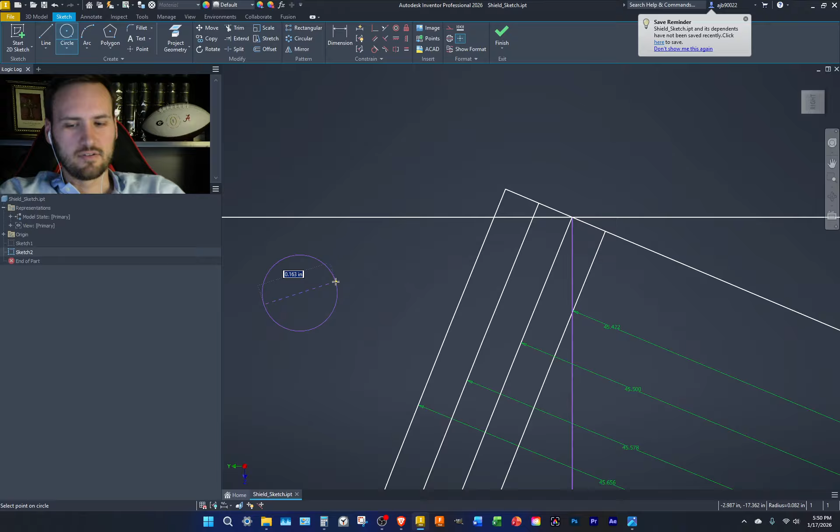0.234375. Let's restart this. Okay, so my idea is I'm going to take this here, put this here, and I'm just going to snap it into place. Let's see if this will work. So I want this to touch here, and I want that to touch here.

Perfect. All right, so now take this circle, have this touch the center point again. There we go. Go up. And now we can get rid of this. And of course it broke. So let's get rid of that. Constraint, there you go. Get rid of these lines.

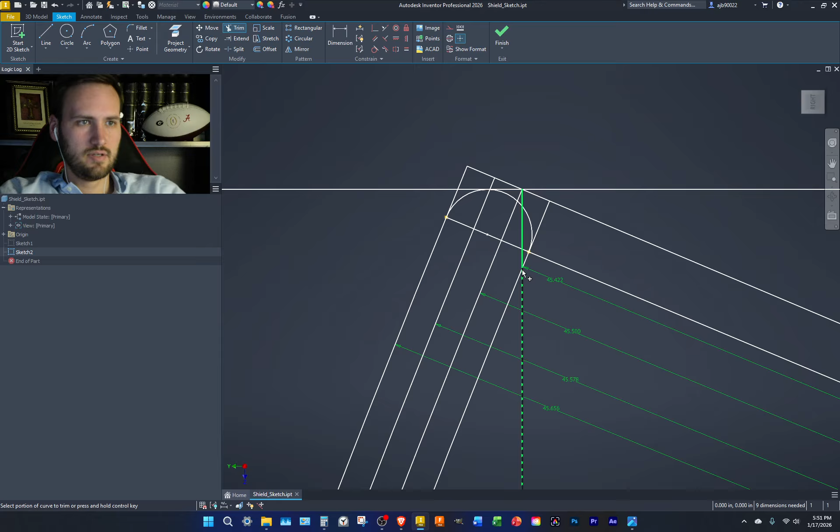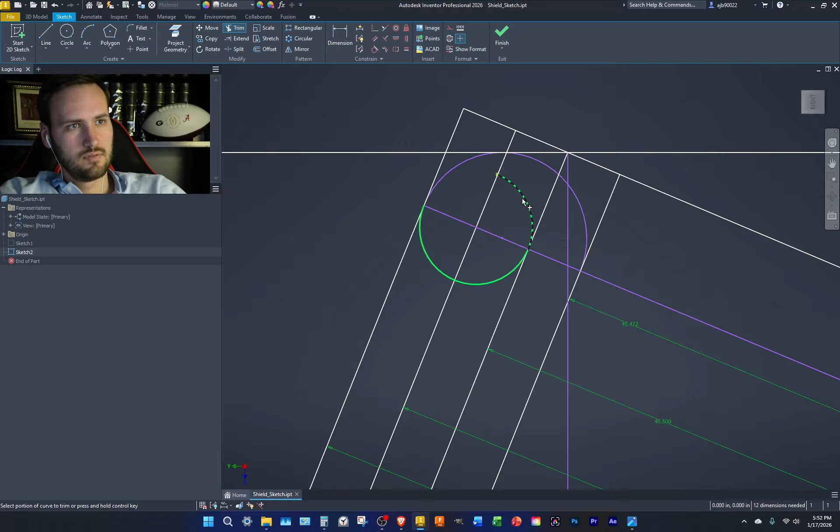All right, so now let's get rid of that. Let's connect these two again. Get rid of this. Connect those again. So now let's take this. Connect that circle. And there we go. Now we do that a couple more times. So let's go ahead and...

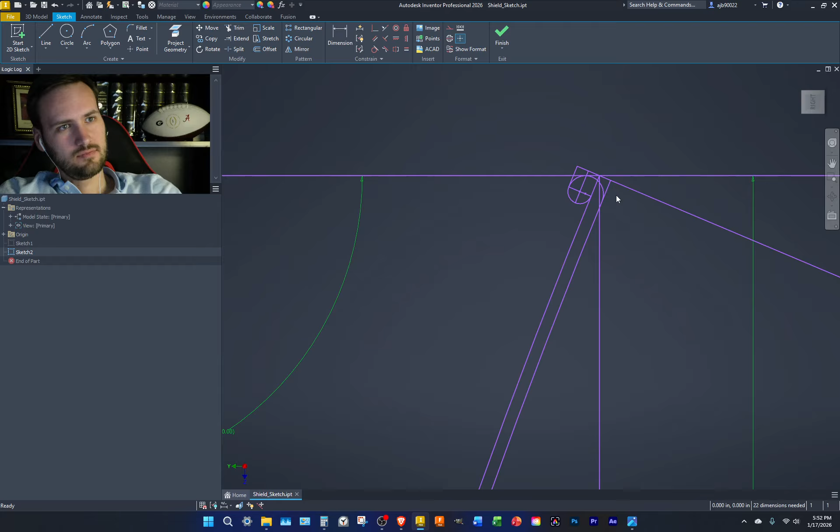Problem is each of them are going to be different. Get rid of that. Get rid of this. Don't need this anymore. All right.

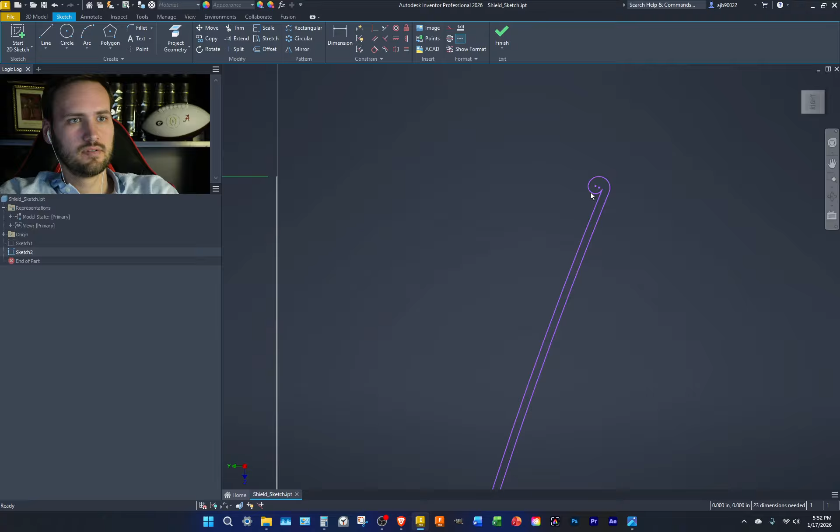So there's our first true roll that I want to put into this. And let's go ahead and get rid of this for now. Get rid of that. And let's give it a look to see what it'll look like in 3D. Whoops. Cut. Get rid of that.

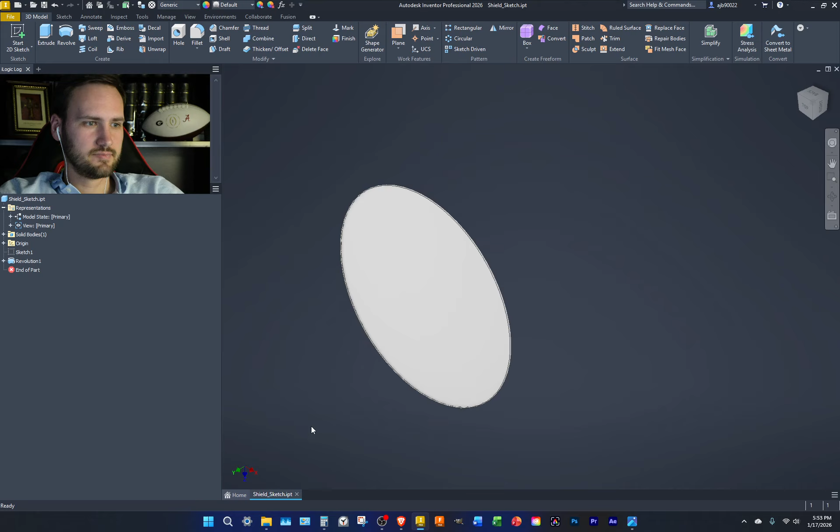All right. So this lip is essentially what I've been going for, and it looks pretty good. I've overcomplicated it to a significant degree, but I wanted to be accurate to the material. So there we go. Save.

So let's go ahead and rename this. Should be able to rename it. So base, and caps lock is on. Let's see. Let's do outer ring, or let's do ring outer. There we go.

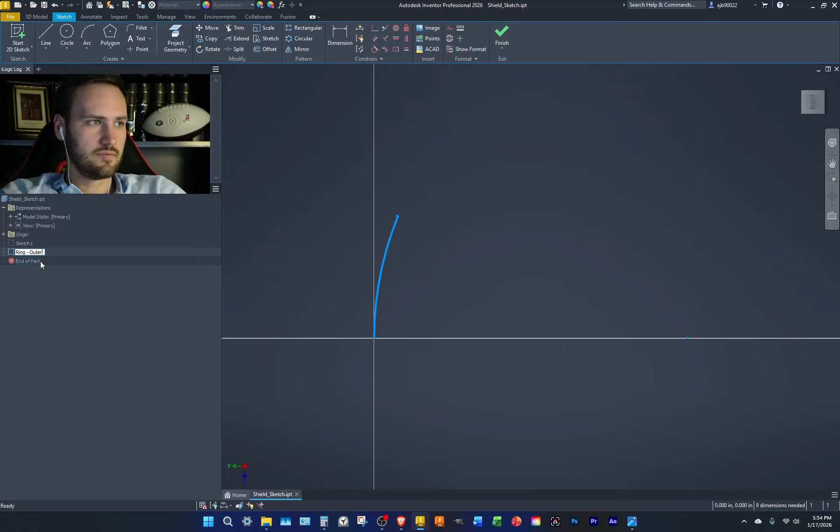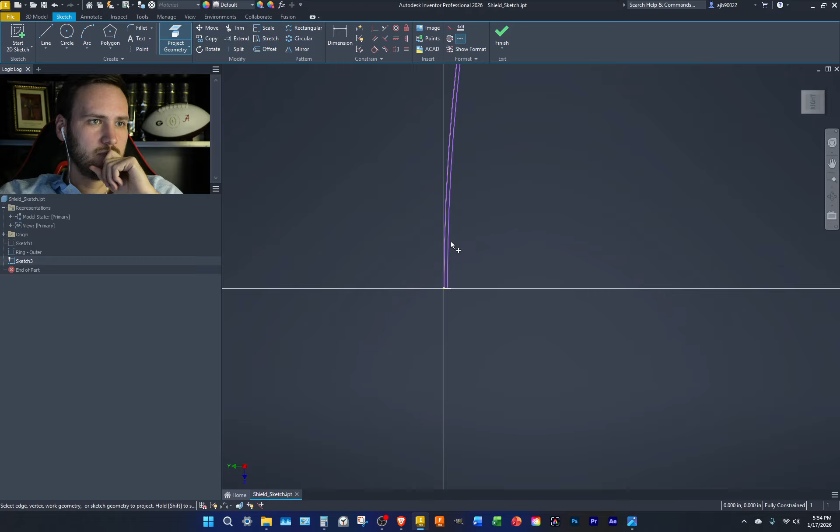All right, so now we have to figure out the inner ring. So let's go ahead and do this again so we don't screw up what we've already done. So let's project this geometry, project that geometry, so we have a good foundation. There we go.

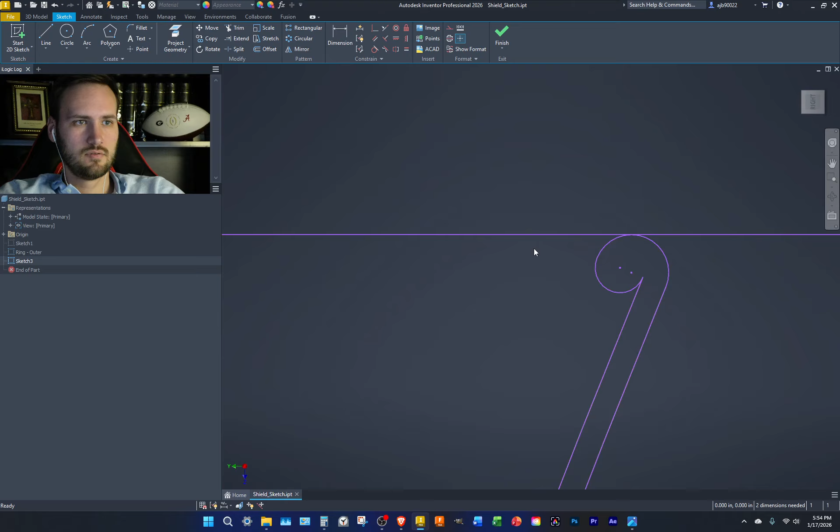35. Don't need this. Cut across. Let's go ahead and project all of it. Don't need that. Don't need that. Let's go ahead and suppress this ring. So we still got one more constraint. Okay. Cut this there. So let's go ahead and go down 3.5. And so there we go.

Now, the question is, there's two ways to go about this. If this is a really strong individual, let's calculate this. How heavy? I guess I could calculate it already, because this can calculate the volume, I'm pretty sure.

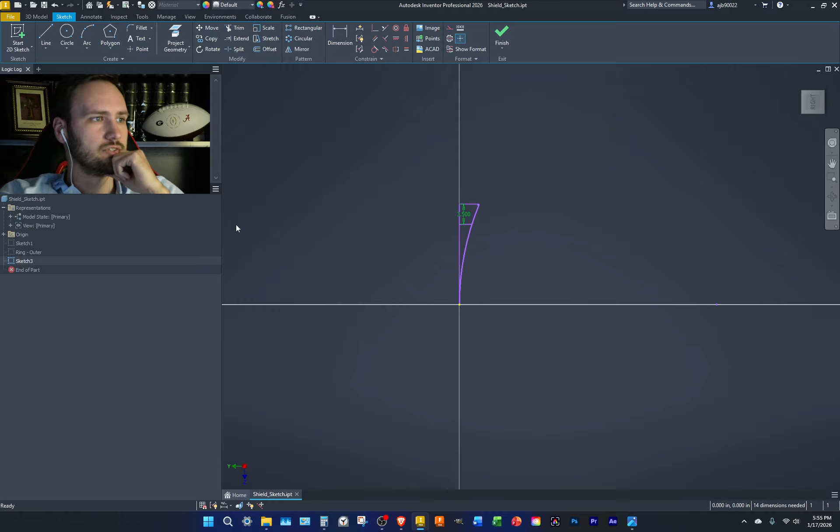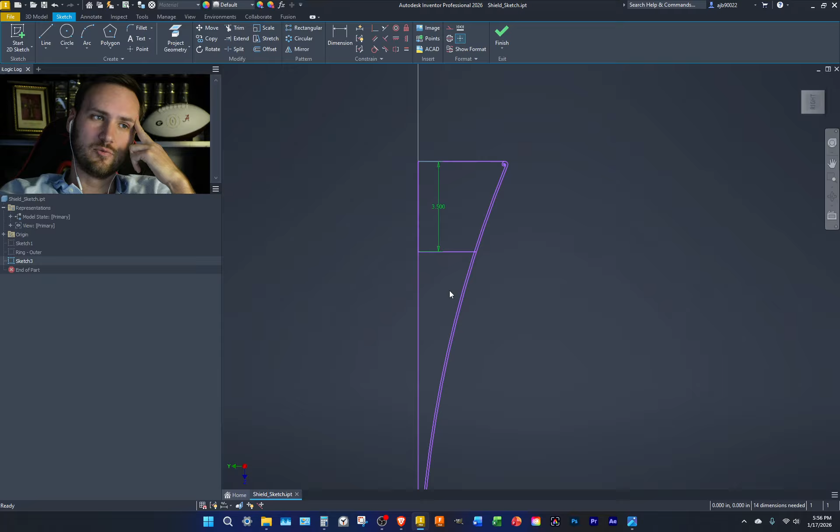All right, so basically what I'm gauging right now is, do I need to cut this into individual rings that are basically bolted onto each other? Can it be just one disc on top of a disc on top of a disc, and then they're not bolted, they're riveted together? And is that manageable for someone? I guess now we could assume that it is, especially if someone as exceptional as, say, Captain America, and then later on, if it's not, it's unwieldy, we can treat it as riveted rings.

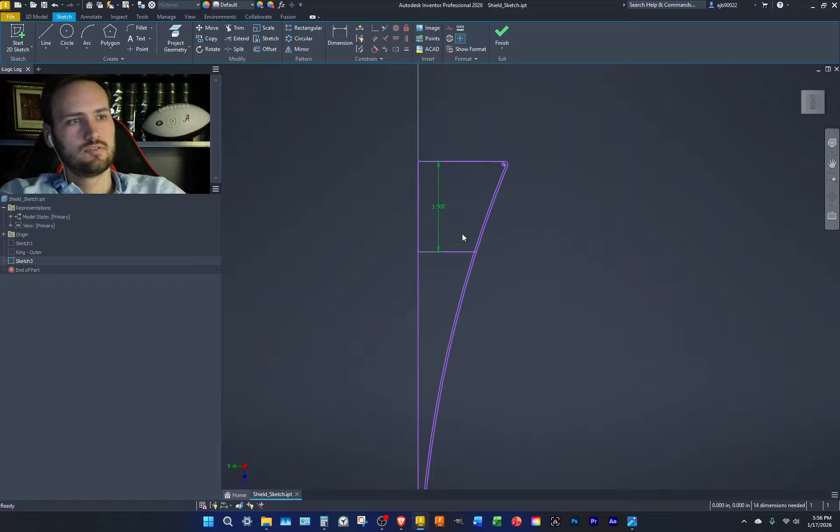And so let's treat it as if it's going to be one shield on top of another shield on top of another shield for now. Let's get rid of this.

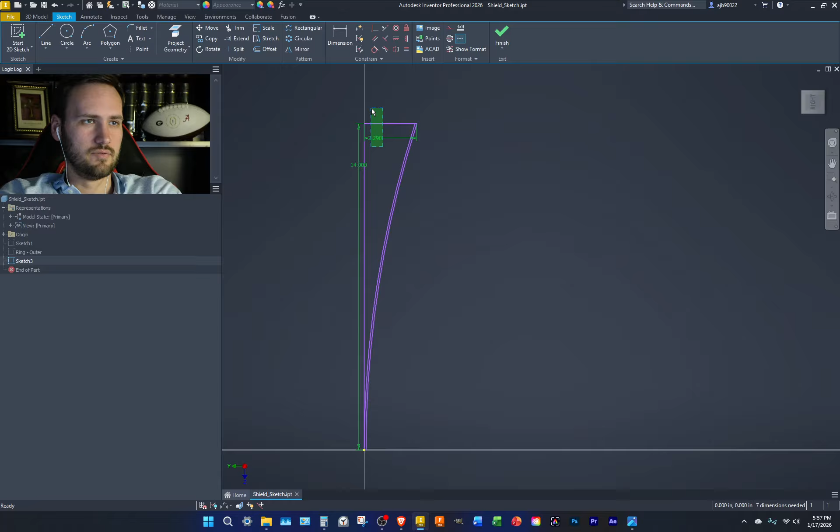So now let's add the constraints again. There we go. Let's go ahead and offset this. And of course, so let's get rid of this. Don't need any of this anymore. Why is it highlighting everything? Something here? Or is it just the constraints?

Or actually, it's probably just this. Okay, it's everything then. Okay, let's get rid of everything. Offset it. 0.078125. 0.078125. Offset. 0.078125. Alright, because it's going to be on the outer side, don't need this anymore.

Alright, let's go ahead and start adding constraints. Actually, I should have done this for the other one too, instead of that, actually tell me where the point is. Wasted time doing the other way. Sorry about that, guys. Let's do this.

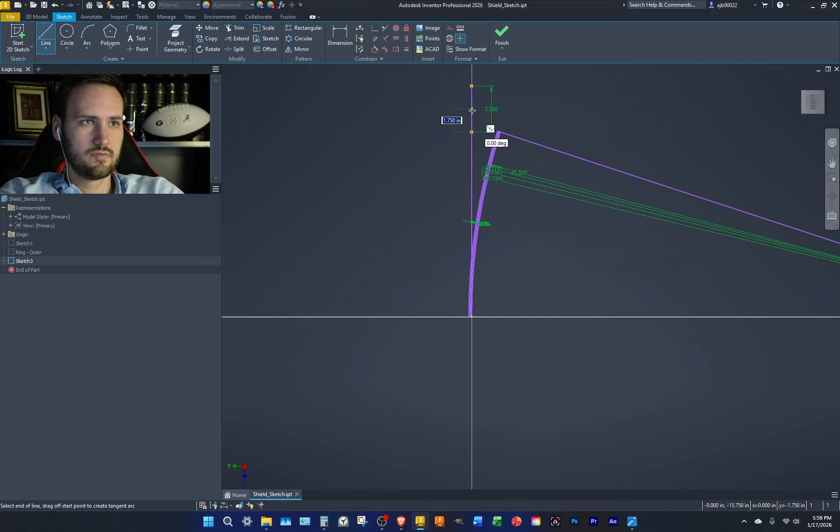Let's see. Let's go back to here and figure out. Actually, that's 35. Which means this needs to come down 3.5. Where is that point? Okay, so it's right here.

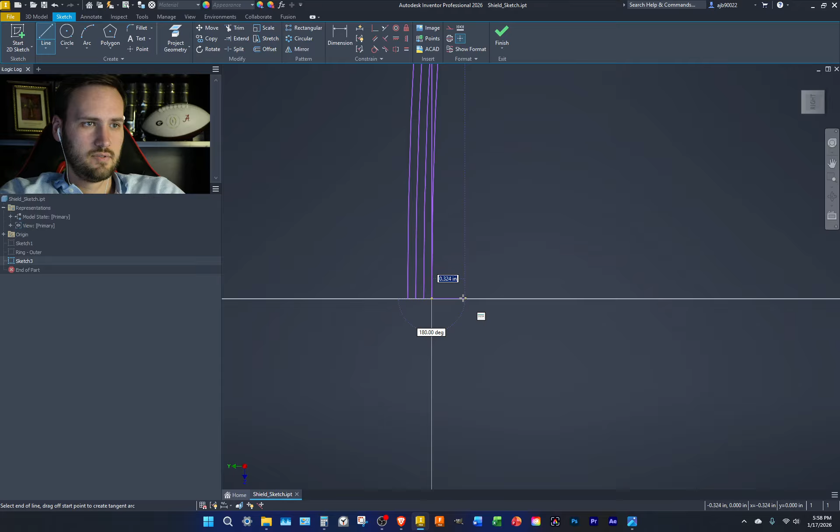So let's go ahead and get rid of this. Let's go ahead and add the following constraints. This is going to be a tedious project. Sorry about that.

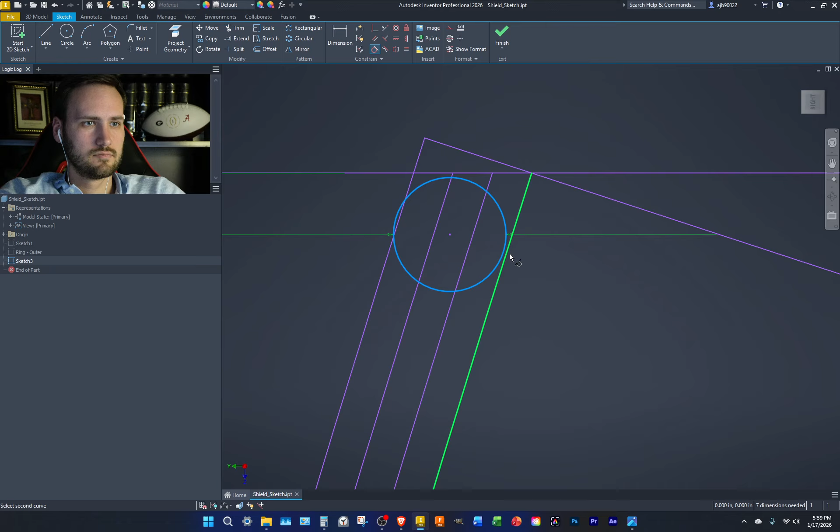All right, so what was the magic number? 0.234375. Oops. Okay, right here, zoom in. Right about there. Nothing moved. Perfect. Okay.

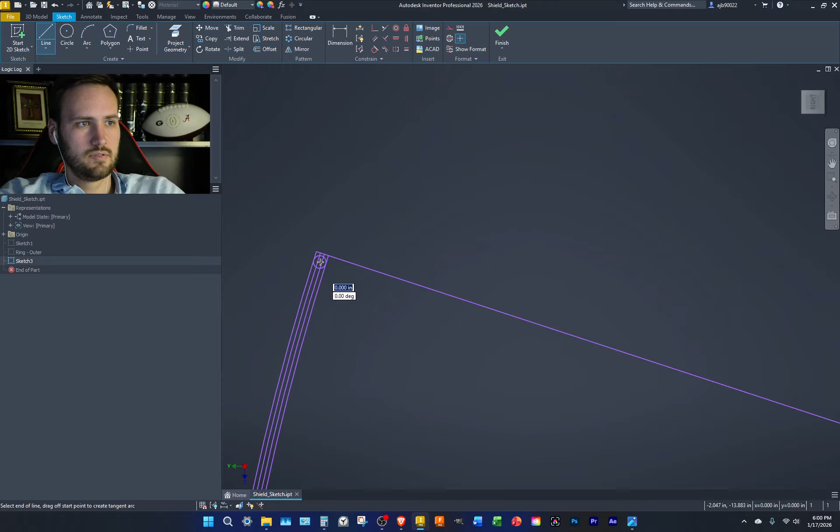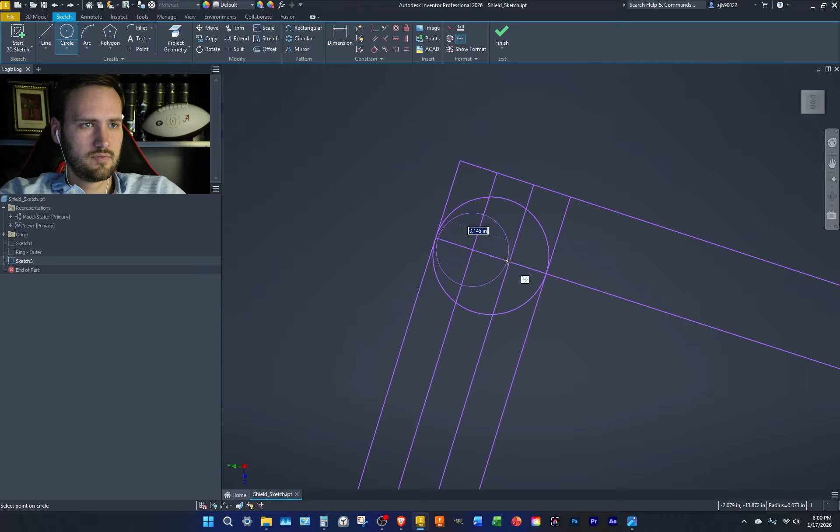All right, get rid of all the supports. Now we can take this, place it there. Okay, go back to the center point. Huh. So now...

We should probably double check this before we start getting rid of constraints. Which means it probably should have left this over here to begin with. My bad.

Should have gotten rid of that. Alright, cool, it works. Get rid of this, get rid of this.

Now I think about it, these aren't necessary, are they? No, they're not. Okay, so next time we do that, I don't have to worry about that.

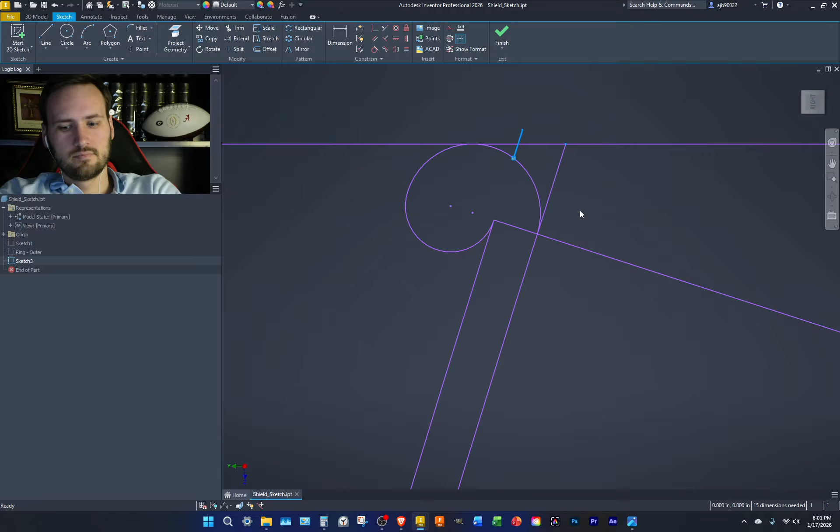Cut this. Okay, perfect, let's go back down here. Cut, cut. Finish. So now let's see.

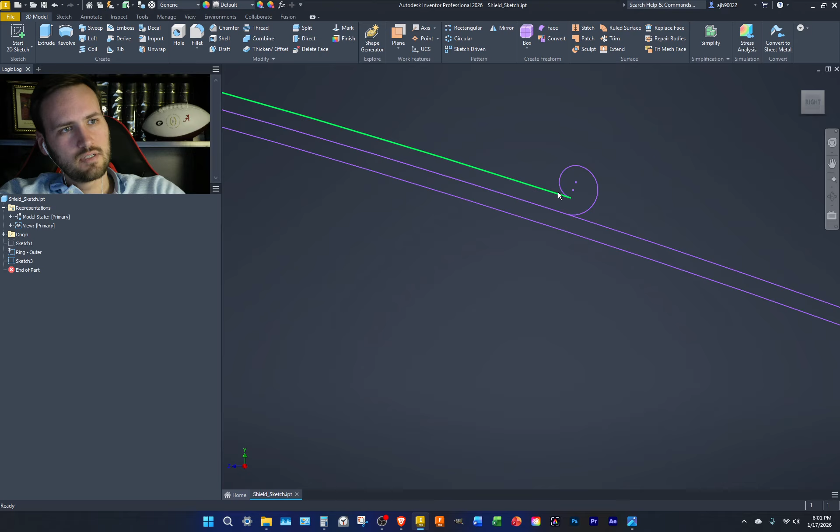How's this looking? That's looking pretty good. What do y'all think? So you can see ring after ring.

And I guess you can see here, is this layering necessary? You know what I mean?

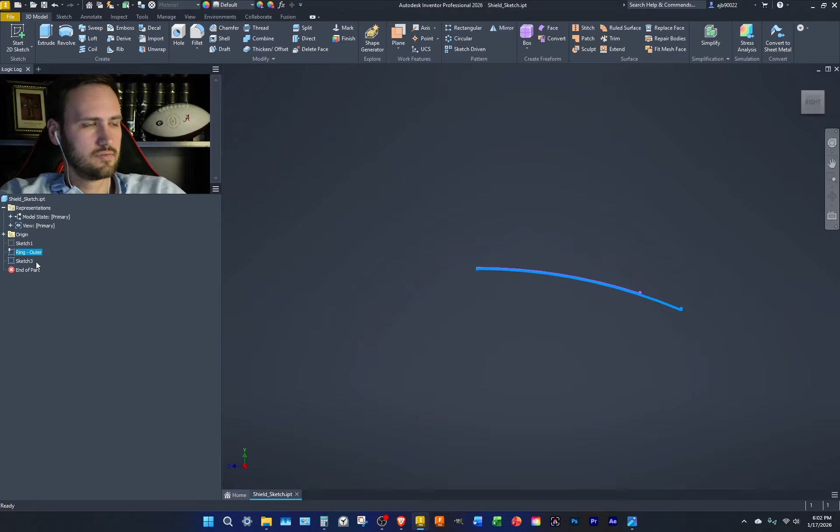Alright, let's go with the next one. Let's do ring, outer. How should I do this?

How many layers are there to the shield? So 1, 2, 3, 4. Okay, let's do layer 1 through 4 then. Seems like a better labeling system anyway.

Let's do layer 4. Copy. 3.

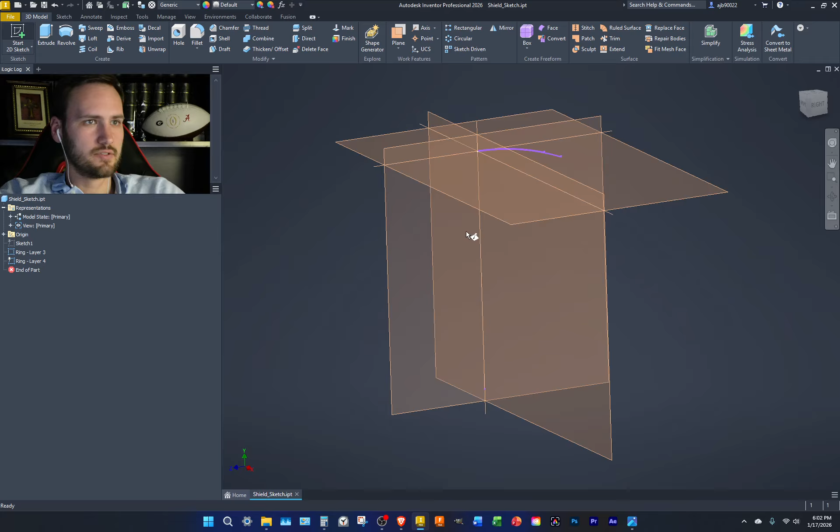That looks pretty good. Alright, let's do another sketch. Same as before. Let's go ahead and label this layer 2, and we'll move it up accordingly. Project, project. Delete, delete. Okay, let's rotate it.

Offset this. What we learned, we only need to offset it once.

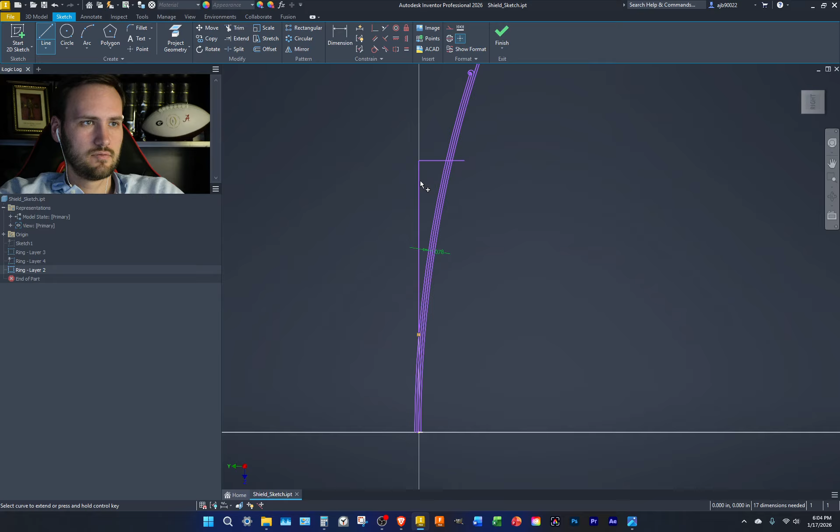There we go. Probably didn't need to do all that, but that's good enough.

I need to put that there, just so that's something to go to.

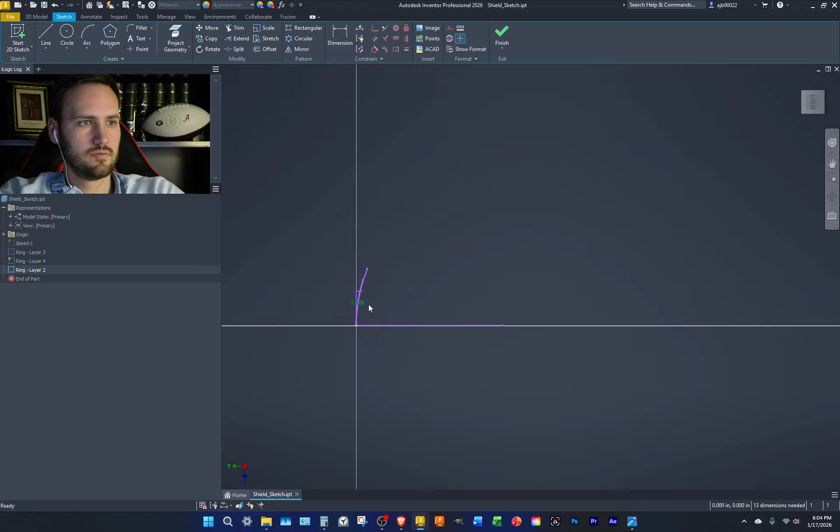Okay, let's take this point, bring it down. Alright, so no, we're not going for this one. We're going for the next one right here. So this is the point it should be going to.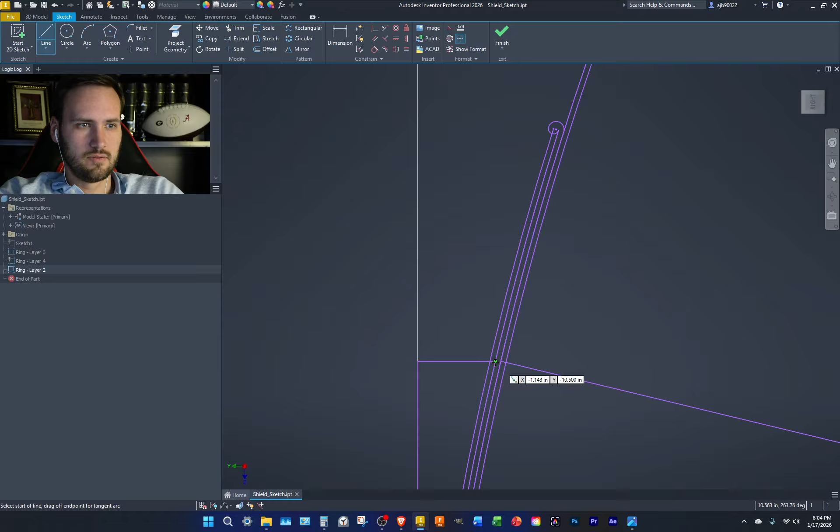It looked weird. There we go. Let's go ahead. So it's 10.5.

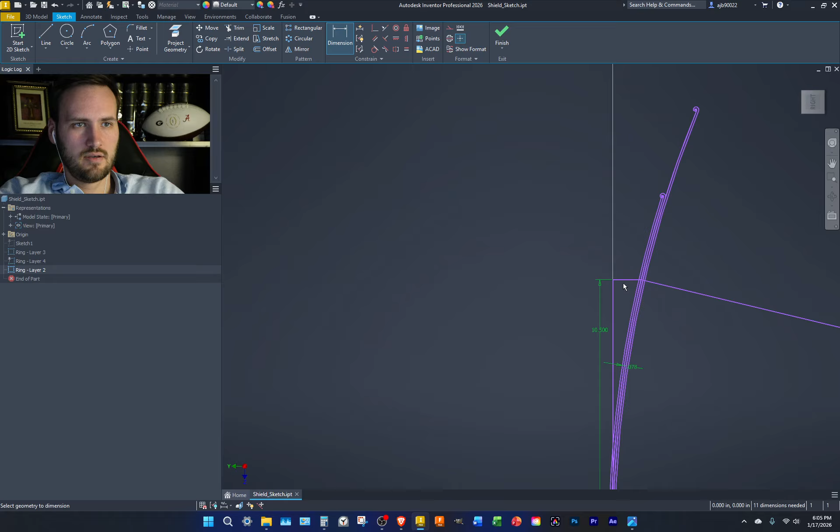Don't care about that dimension. Let's bring this down. 90.

Alright, so let's hide the layers so we're not confused. Okay.

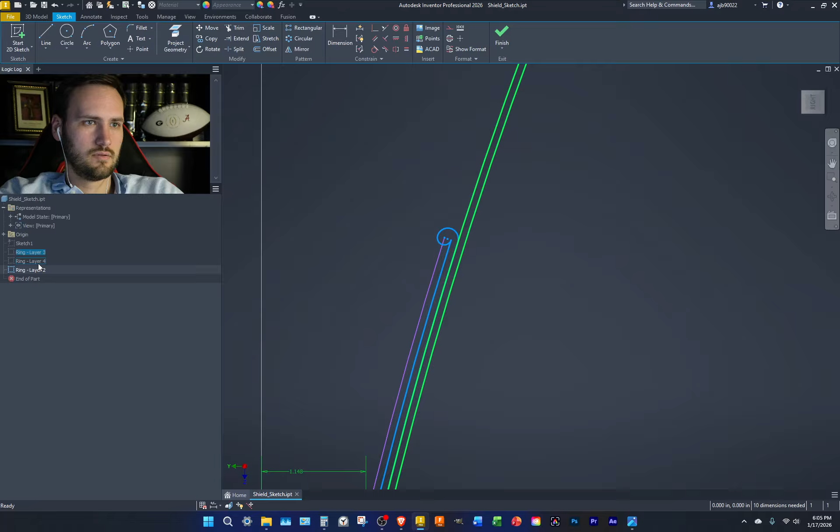Well, which one's this one? So we got that, that. Okay, so we accidentally highlighted the one, but let's see.

So we don't need this one anymore. Trim that. So really what we need is

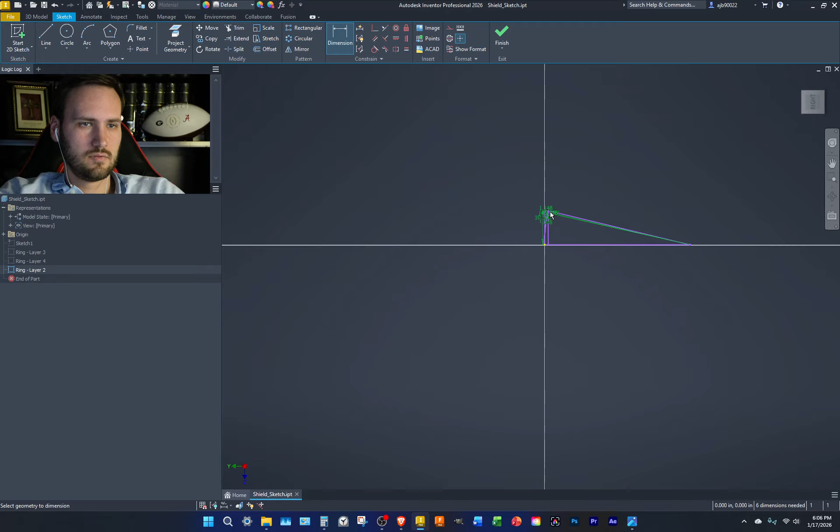Accept. Accept. Alright, let's try this.

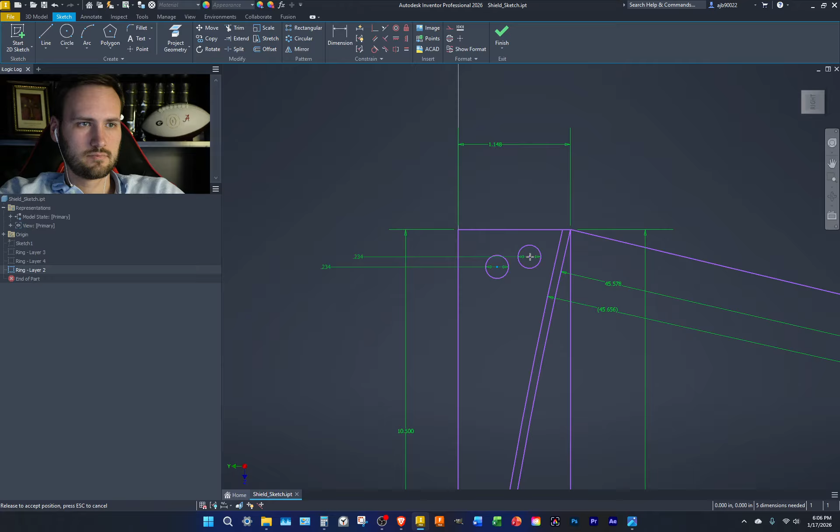0.234375. Please don't break anything. Perfect, perfect, awesome. So trim, get rid of that line, get rid of this,

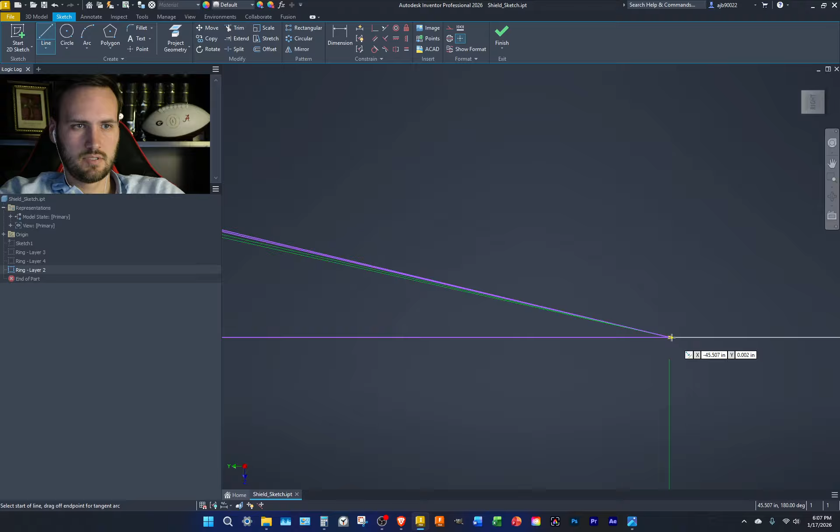Take that. Attach. Okay, before we keep going, I forgot to save. Alright.

So now, have that go there. That's why we need one more. To define that. We don't need the outer one though.

Perfect. Cut. Get rid of this, get rid of that. Don't need this, don't need that.

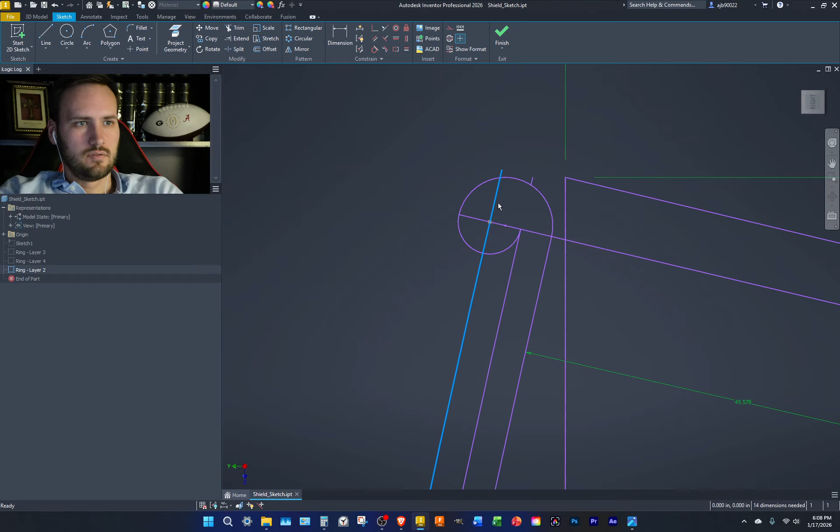Alright, so let's see what we got. Okay, let's go ahead and save. That's layer 2.

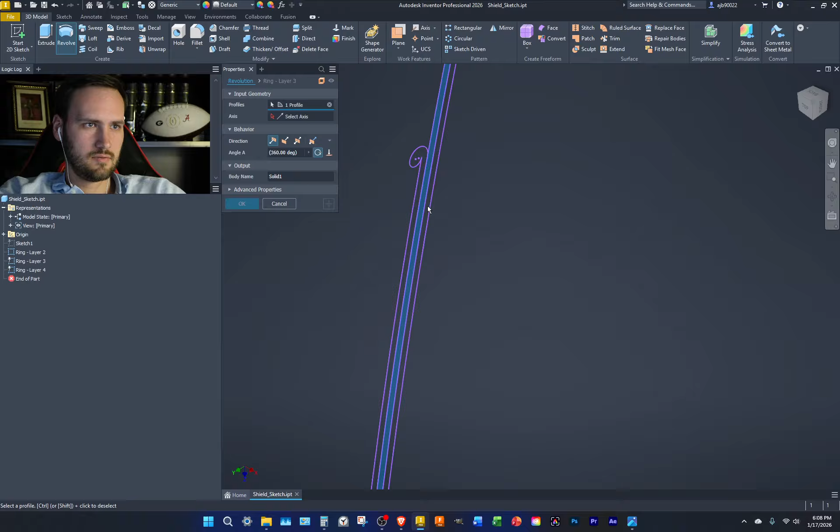It's looking pretty good. You want to take a peek to see what it will look like? Let's see. Profile. Should be able to pick more than one. I guess not.

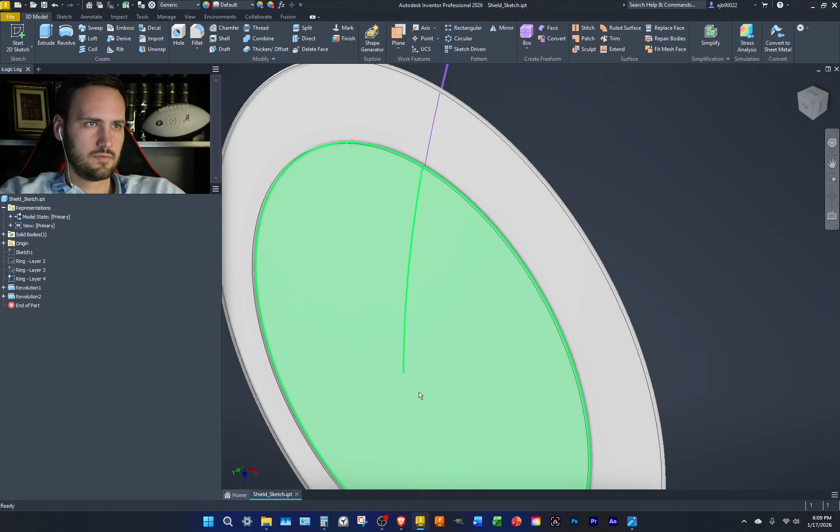Okay. There we go. Starting to look like a Captain America shield. What do y'all think?

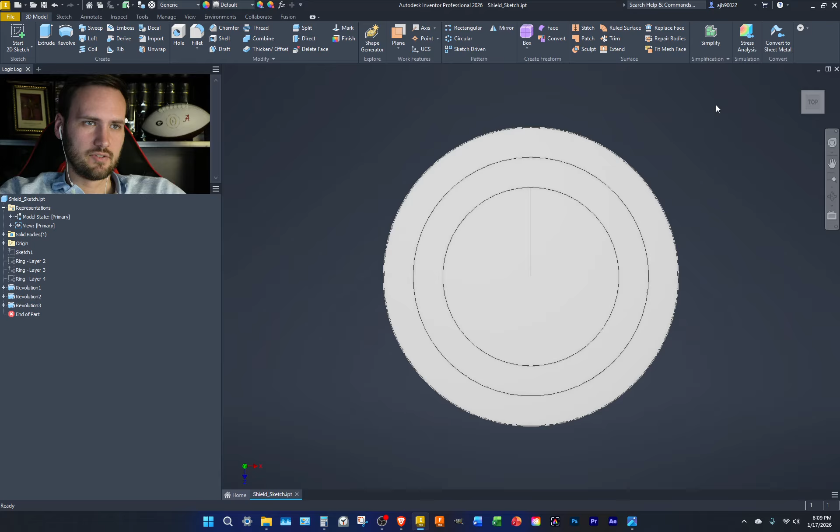Yeah, that line's just legacy. It'll go away once we turn to a STEP file. Looks like we have one more ring to do.

Alright, so it's, why are these grounded? Oh, they, okay. So they have, so they're sharing something. I'll worry about that later.

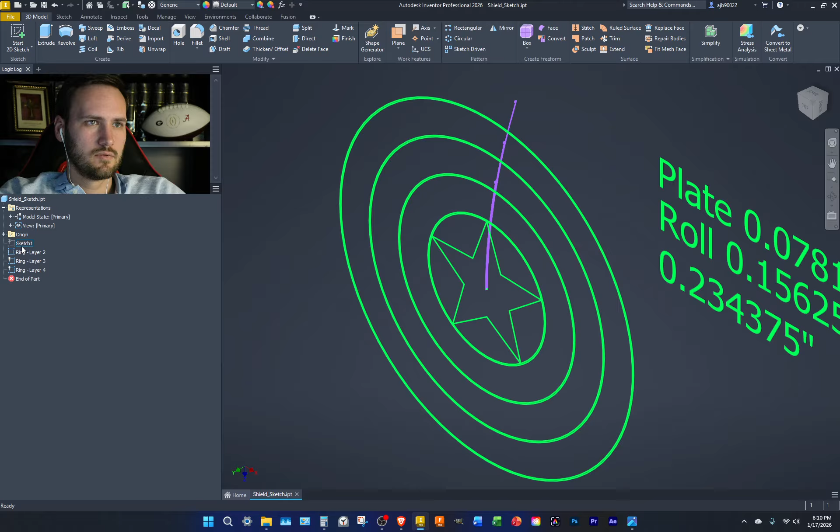So let's go to here. Let's add the final ring. Let's project this geometry. Don't think we'll need anything else.

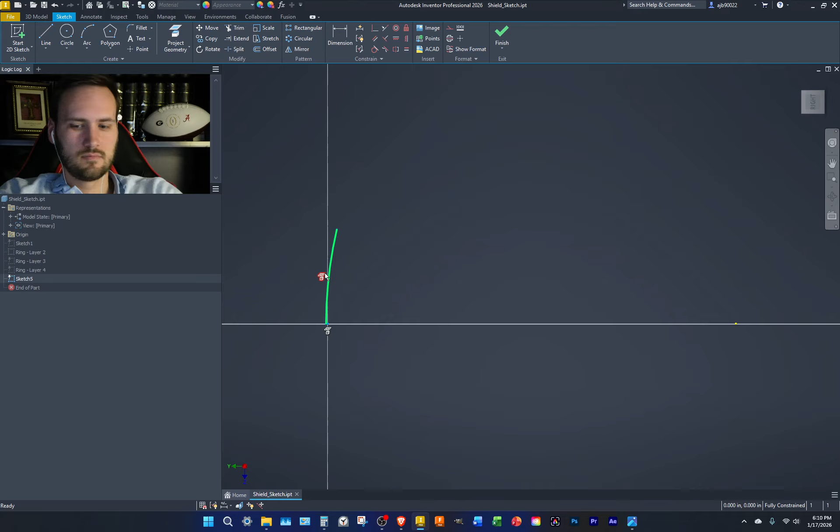Let's offset it. Oh, 0.078125. I think we'll need one more layer, right? 0.07. Okay.

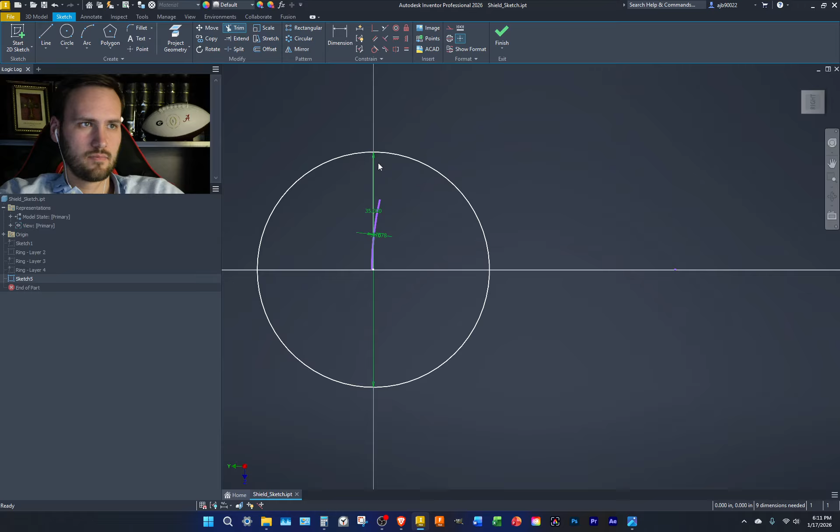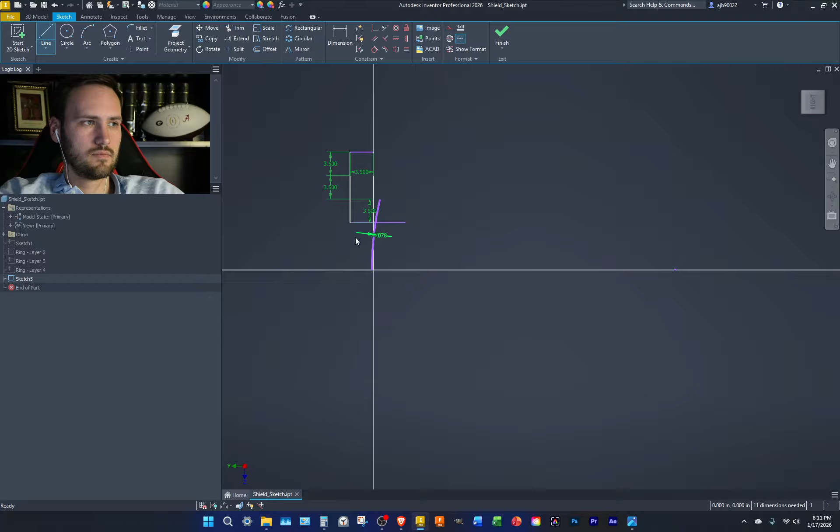Okay. Let's actually move this up. 3.5. Okay. Alright, there we go.

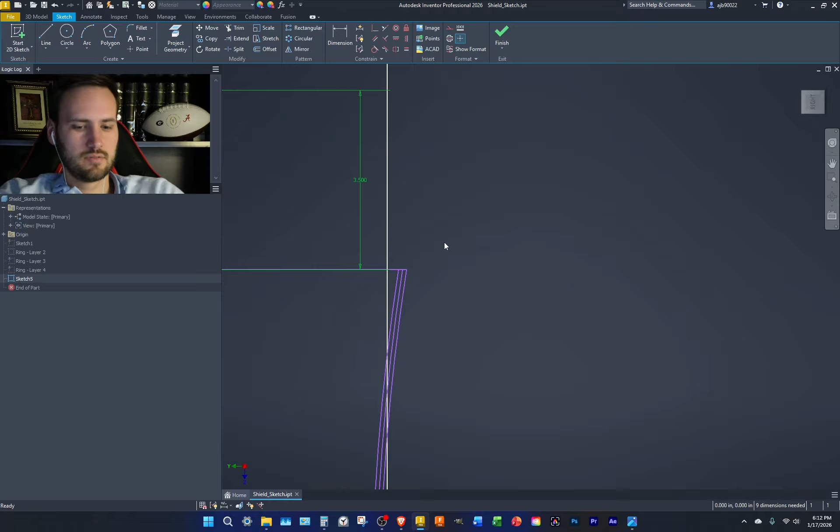Let's see here. Okay, so this layer has to live in. Get rid of this. Okay.

Let's go ahead and, where is that point? Oh, there it is. Alright. Seven.

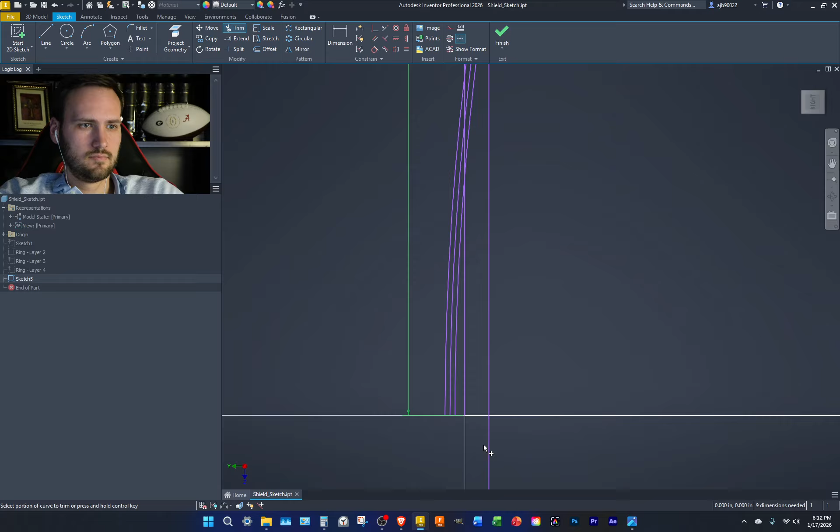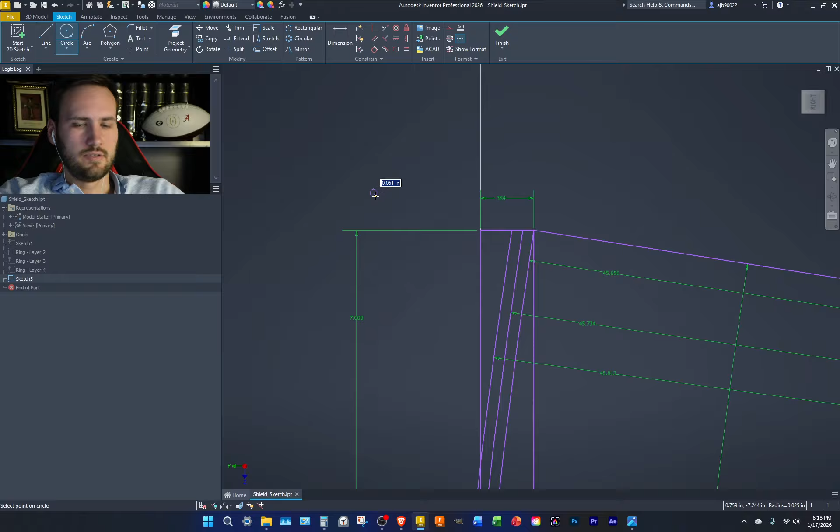Let's take this, extend it. There we go. Let's try this again. 0.234375. Let's bring it in.

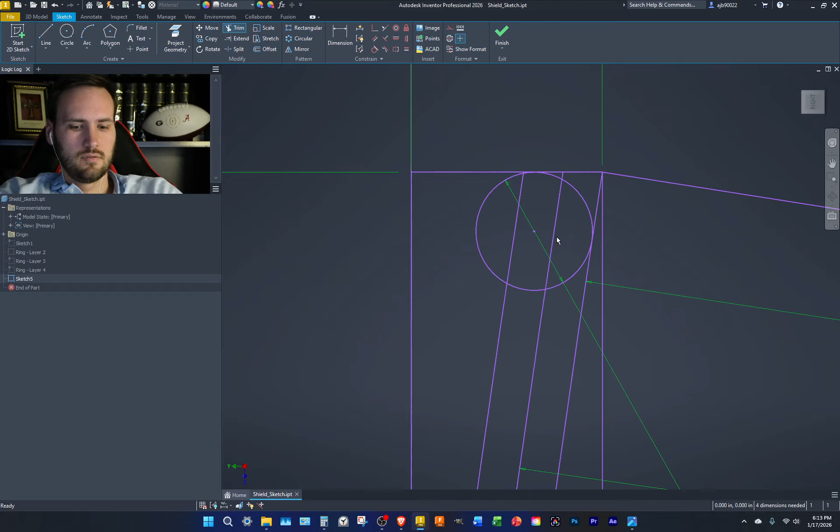Alright, do I need more constraints, or is it good enough? Perfect. Let's go ahead and do the last part.

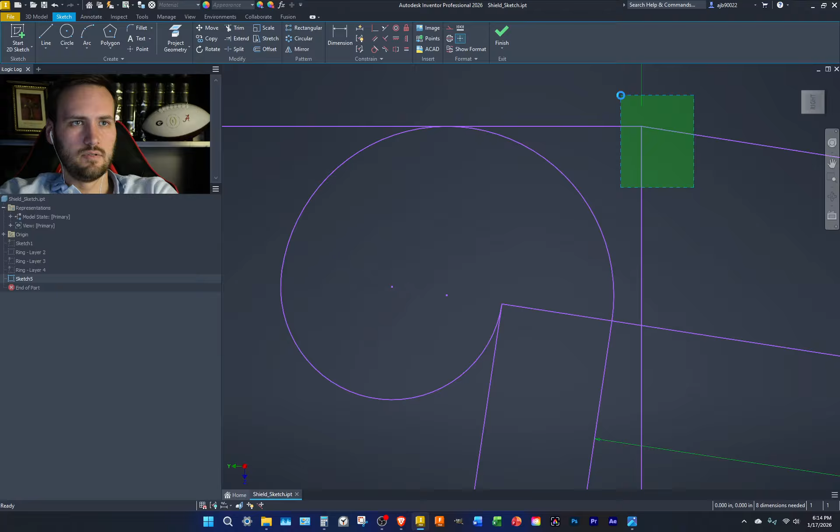Get rid of the excess that we don't need. All right, get rid of the skeleton. Oops, got rid of too much there. Get rid of that. Get rid of this. Perfect. All right, now, whoops. So there's a little bit extra there that we don't need. Just cut that. See, we don't need this anymore. And there we go.

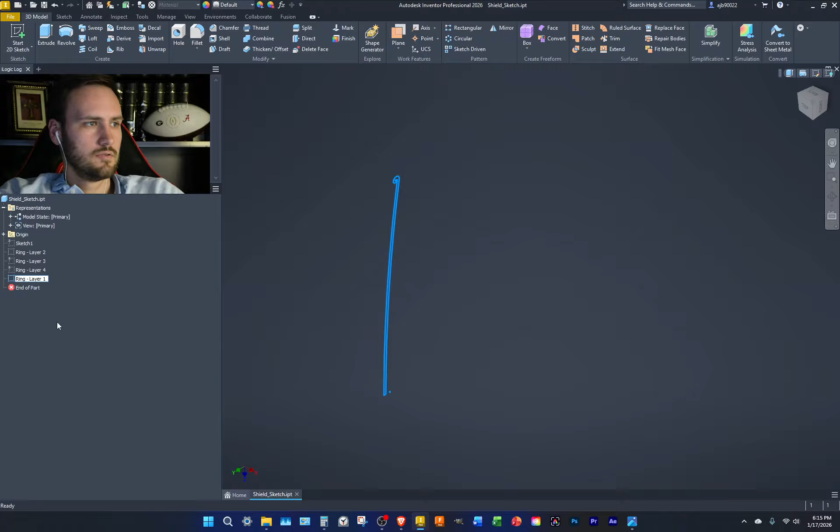Layer 1. What do y'all think of that?

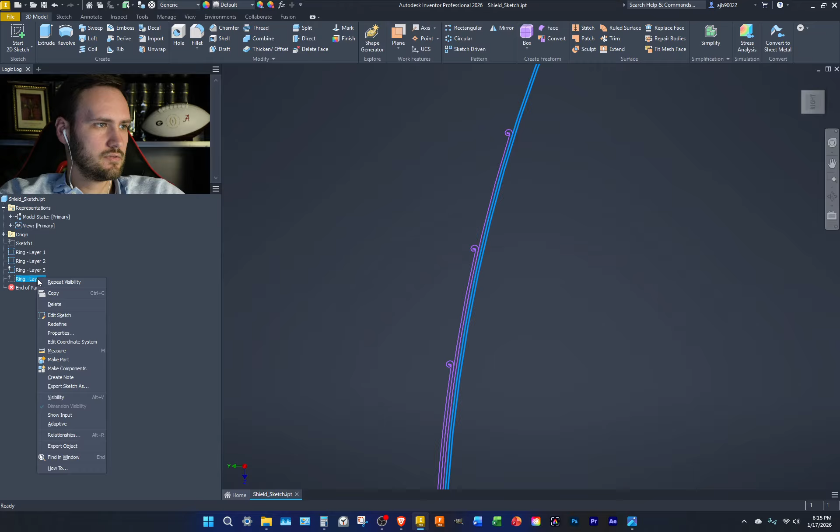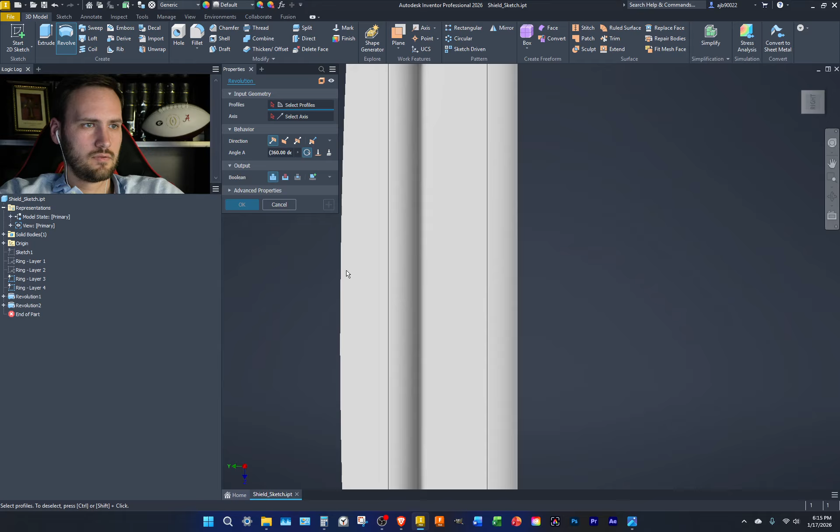Okay, visibility, visibility. Okay. There we go. That's like a pretty good Captain America shield. Oh, okay, so I think I know what these are. And share, and share.

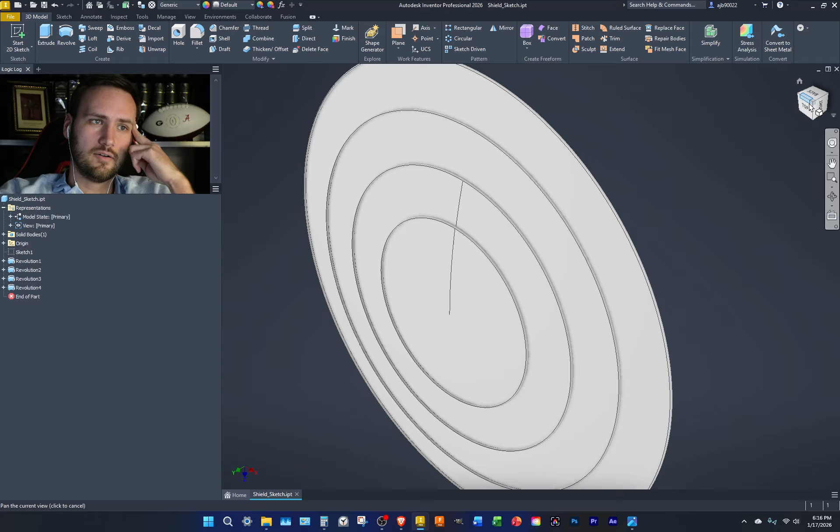All right, so now we got that out of the way. Let's actually measure to see how heavy this thing is. So inspect, tools, measure, measuring the faces. Let's see. Properties. All right, let's see.

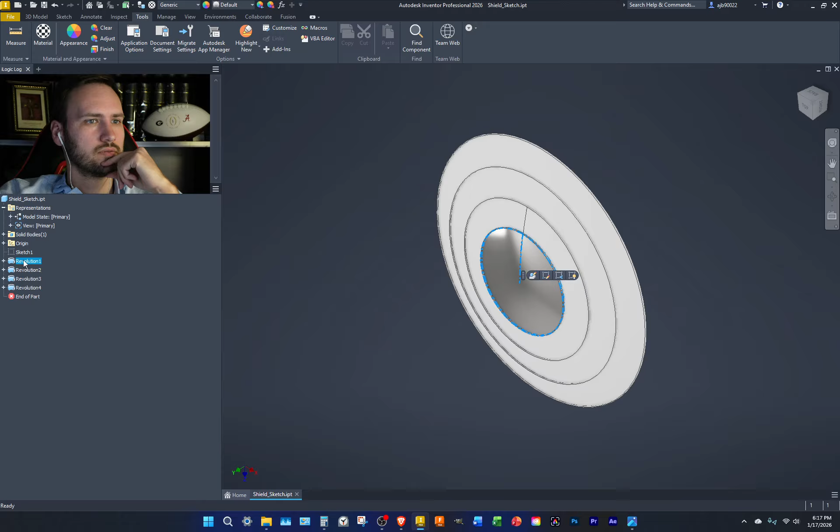Be a mild steel. Let's see, steel, cast, polished. It's too polished. Did that do anything? It's not what I care to do. As I cancel, all right. Let's undo that. There should be a way where you... let's see, express, expand all children, relationships, find properties,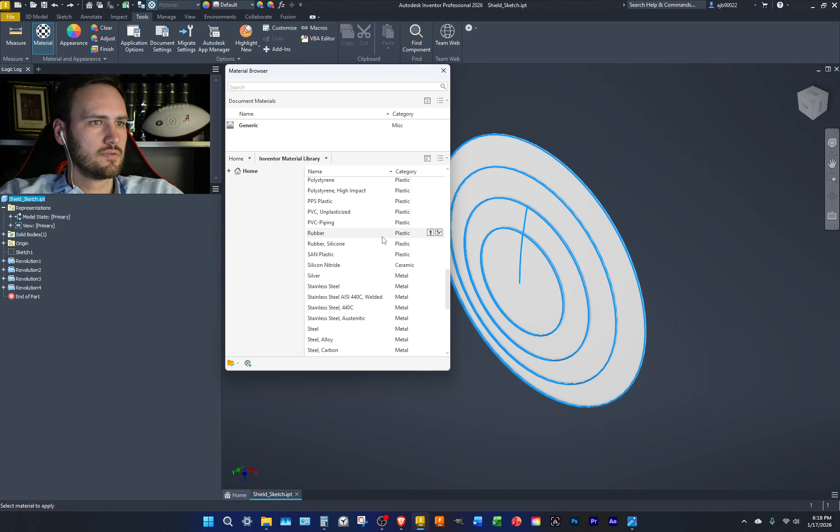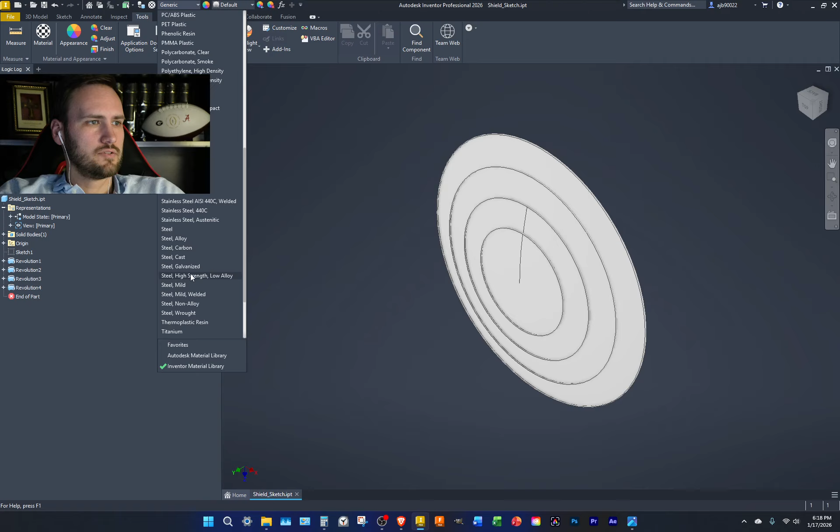Measure. Advanced, precision, angle, dual, none. Steel, mild, so steel, mild. Why is it not changing? There we go. Properties, here we go, okay. Size on disk, size, location, summary, project status, custom save, physical. Density, low, mass.

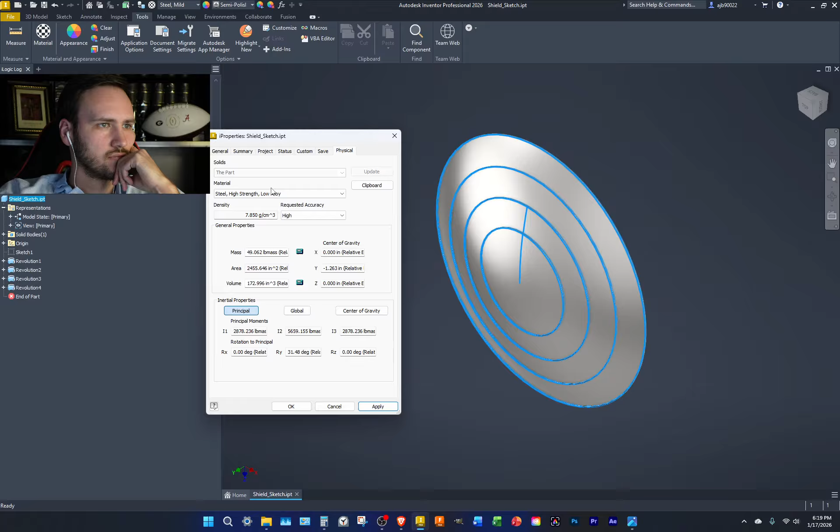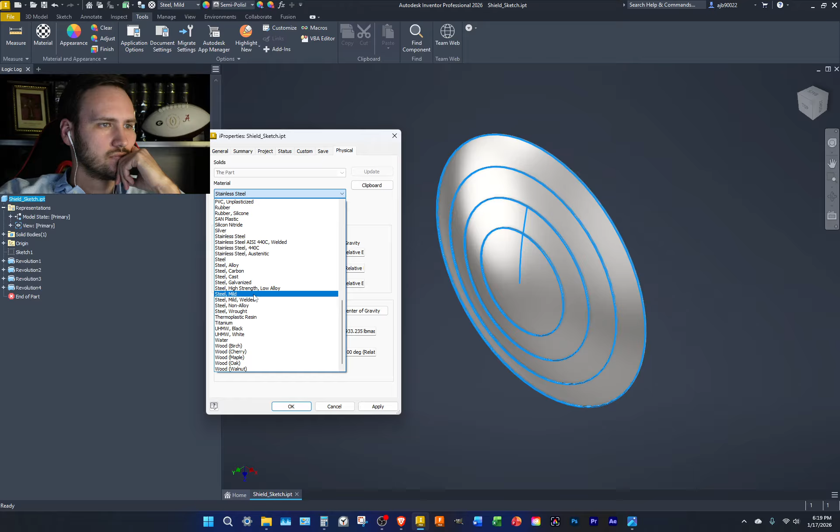Update. All right, mass is 49 pounds. Is that really the mass of this thing? Let's do high accuracy. I guess it does change the density of it. So back in the day, it'd be closer to a mild steel. But 50 pounds. Center of gravity.

Let's see, how heavy was the average shield back in the day? How heavy was a wooden shield? So the typical weight was 4 to 7 pounds, with many reconstruction estimates falling around 5 to 6 pounds. So this thing is way overweight then.

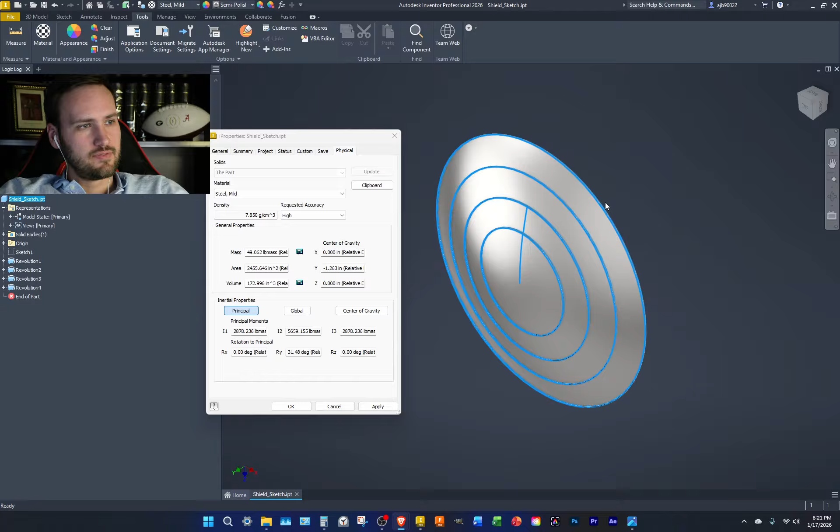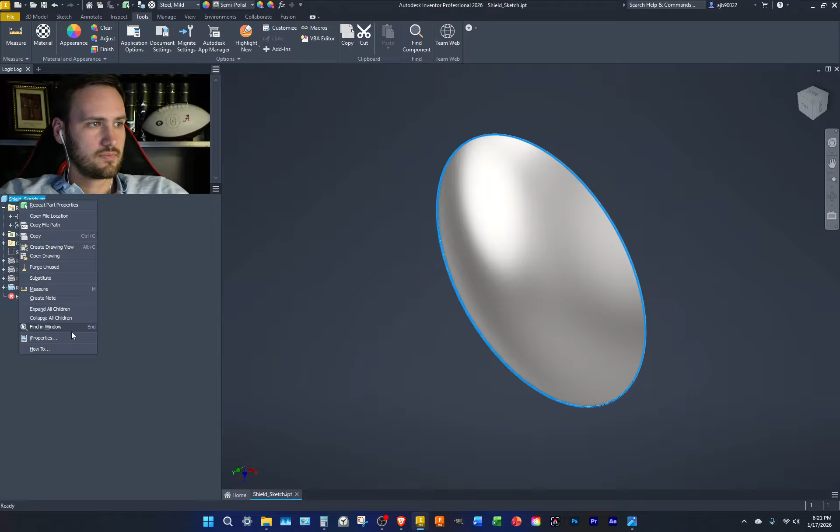Well, I guess if it's Captain America, right? But even then, that's a lot. Let's see, how much would this be if, say, we suppress these features? How heavy is this? Properties. So that's 22 pounds right there.

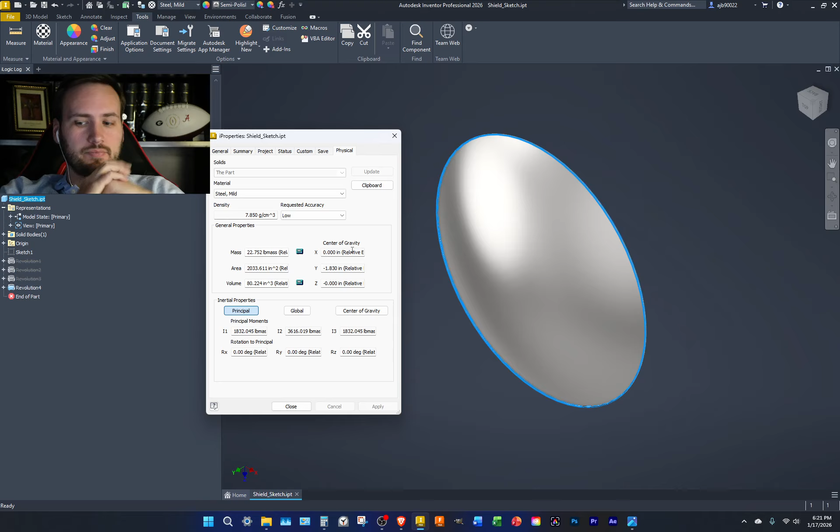So I guess the smartest thing to do is to do a weight-saving type of shield. What do y'all think? So the smartest thing to do might be, just as there's rings here, might need to do rings on the back just to save on weight. It's already ridiculously heavy, it's 10 times the weight of a regular shield.

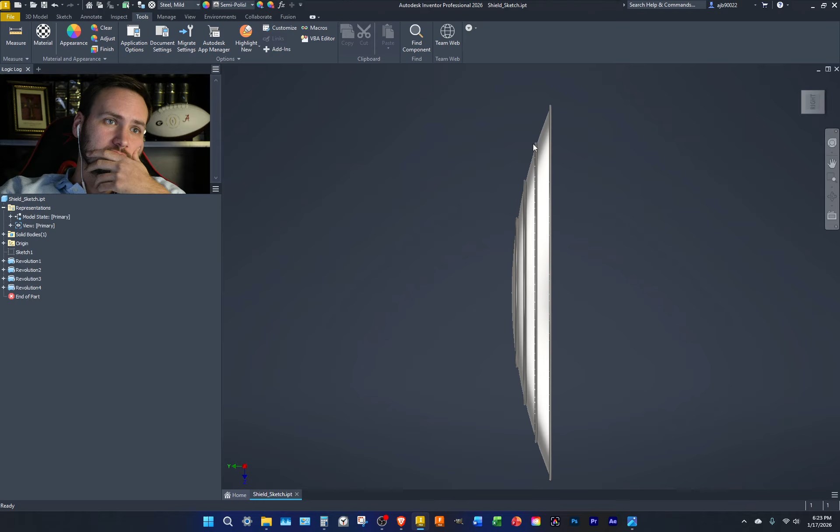Only other thing I can do is I can cut the weight down by bringing it down to a millimeter in thickness rather than 2 millimeters in thickness. I think just to keep it manageable. Let's see here.

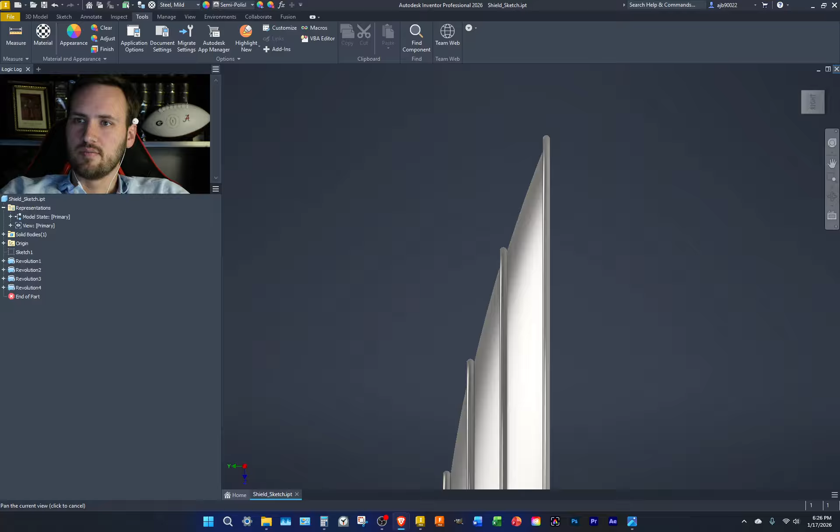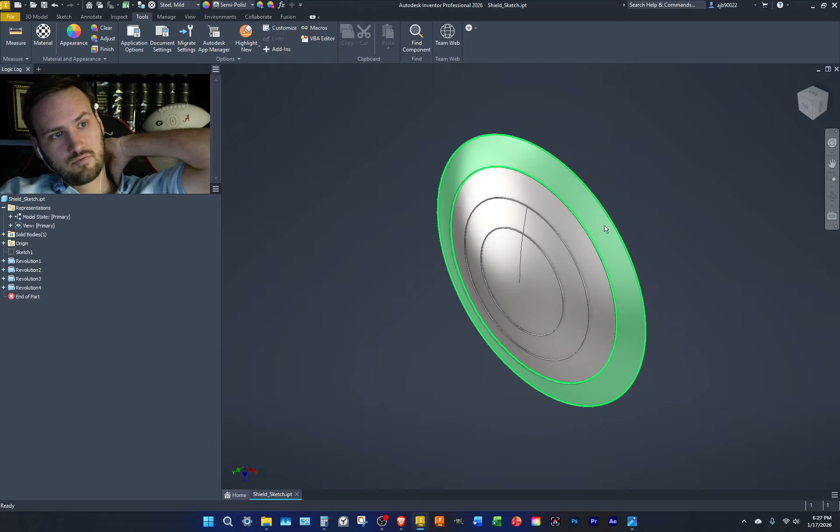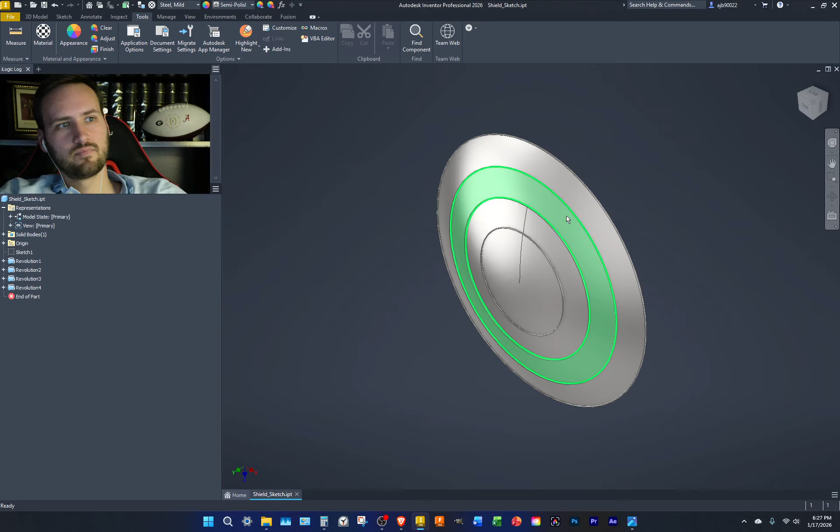Even though it's like, say it's Captain America, you still want it to be wieldable, and I'm treating this as if it's standard infantry, so to speak, back in the day. So I guess we'll leave it there for now. We kind of have an idea as to where we're headed. So there will be rivets involved, there will be a star here, and this won't be, I guess how you'd say, just shield on top of a shield on top of a shield on top of a shield. It's 45 pounds, it's way too heavy. But we'll get on it then.